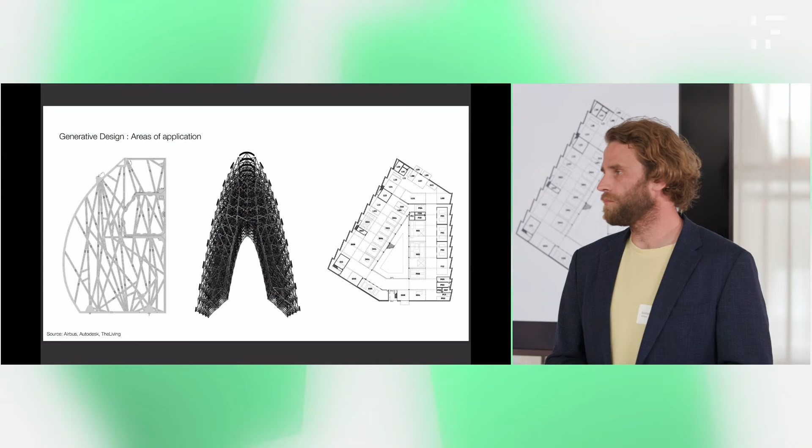So the big gift that additive manufacturing gave us was maybe not the production technology, but it was the advancement in new design principles that can be applied in other areas as well. So let's talk about the first partition, the Bionic Partition 1.0. To recap this a little bit, this project is quite old, and we have been looking at slime mold algorithms that we used to create a design of a lattice structure for a cabin partition.

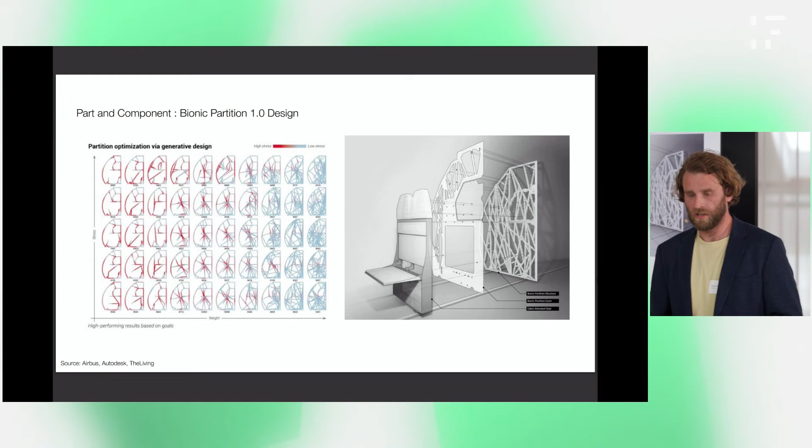I also will talk about a partition 2.0 and 3.0, but all of these partitions have one thing in common. We wanted to decouple the core structure, which is made from metal, from the decorative elements, such as covers and so on, in order to have an increased recyclability. So environmental concerns also play a major role when we talk about additive manufacturing, because additive manufacturing in general will allow us to reduce the weight, and in the area of aviation, this is basically one of the key facts to decrease cost and to improve the product performance.

So the partitions I want to talk about today are shown here. At the very left-hand side, you can see the standard partition, which had a weight of 65 kilograms at that time. It comes with a technical performance where we measure the deflection of such a panel under a 9G force. For the first partition we did, you may have noticed that some mass indications are missing here. I'll come to that later.

The first partition we did was made completely by 3D printing, by additive manufacturing, as we say. Made from Scalmalloy, which is an aluminum magnesium scandium alloy, which we can only create in a 3D printing process. Because of the chemical behavior of the material, we need very high cooling rates for the material to finally get its properties. So we cannot use this Scalmalloy material with casting or even milling processes, because we really need this cool down in the build chamber.

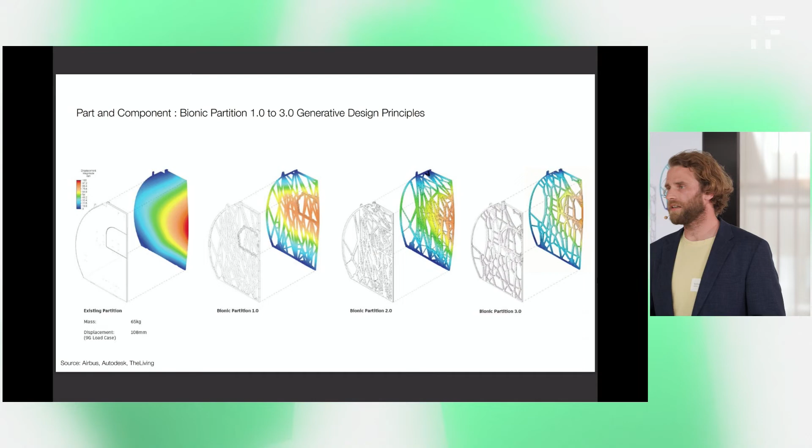The second partition was a one-shot design for casting. Why do I say casting? Because we teamed up with a company who printed the entire tooling for it. So we moved from direct printing to indirect printing in order to harness the cost benefits that casting can bring to us. And the final partition I want to talk about today goes back to a very traditional process, where we were looking at CNC milling.

But before we talk about the other partitions, I just want to show some pictures from our test campaign of the first Bionic Partition, which is fully 3D printed. You can see here at the left-hand side the test rig with the partition. We did this 3 years ago in a laboratory at TÜV Rheinland in Cologne. And you can see a lot of chains there. In one of the tests, we had a cylinder that pulls 5 tons, and we had to distribute this force to dedicated points on the partition. So we had a construction in front of the partition, called a whiffle tree, that allows us to distribute this high force into all areas.

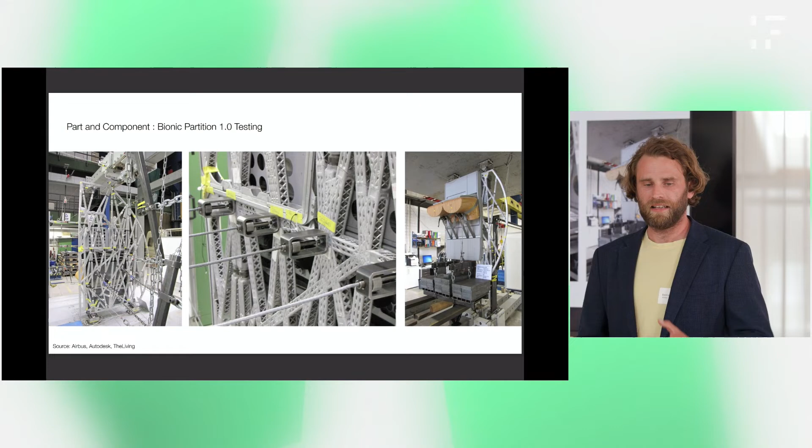In the middle, you can see how we managed the connections. That was a project in itself, to really make the best design for a component that was 3D printed at the end of the day. And at the right-hand side, you can see also a very interesting picture. This is the so-called upward force test. So we were looking at forces that go up. So we turned everything upside down and just put some weights on it.

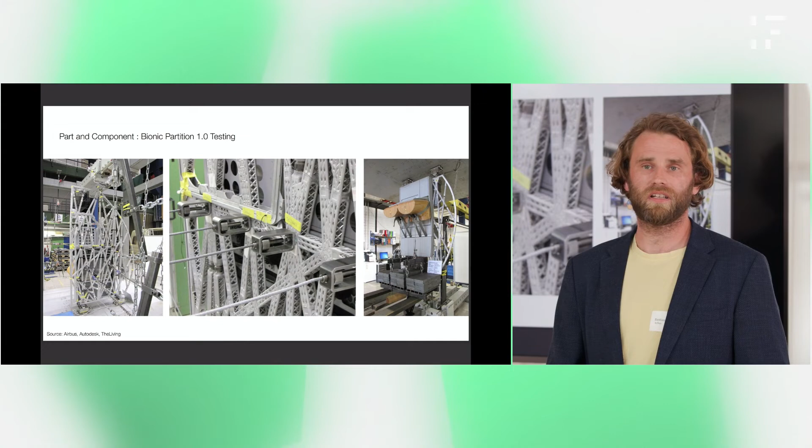The result of these tests was that we almost satisfied our 9G static test. Unfortunately, the partition broke at a certain point, not due to the use of generative design, but because I had designed a bad component that was the root cause of the collapse at the end of the day. But I can tell you, we were all impressed by how great such a design made from lattice structures is. So with some tweaks and some redesigns, I'm pretty sure this partition would also resist the kind of forces that we require.

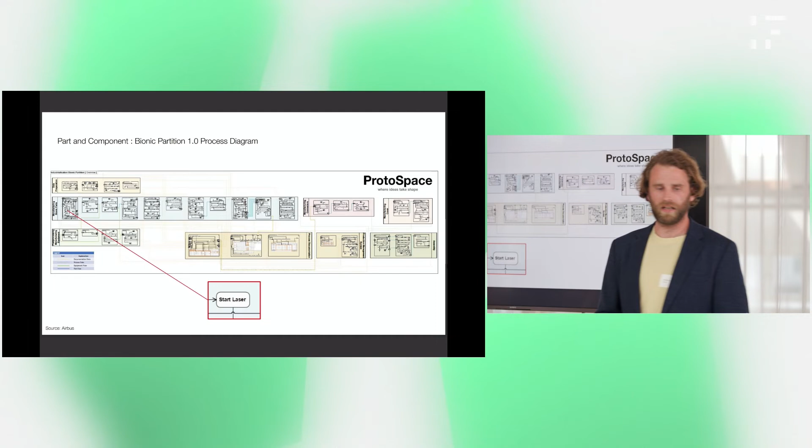This is one of my favorite pictures that I want to show you. This is the entire process of how to design a bionic partition. And what we are talking about is this small image here in the center, start laser. This is what the entire industry is talking about: we can get manufacturing-ready components right away and just have to push a button to build a component. But this is not true. Additive manufacturing comes with a long process, especially when we talk about certification for aircraft components. Here in the center, you can see all the processes and post-production processes that are required to have one component in your hands at the end of the day.

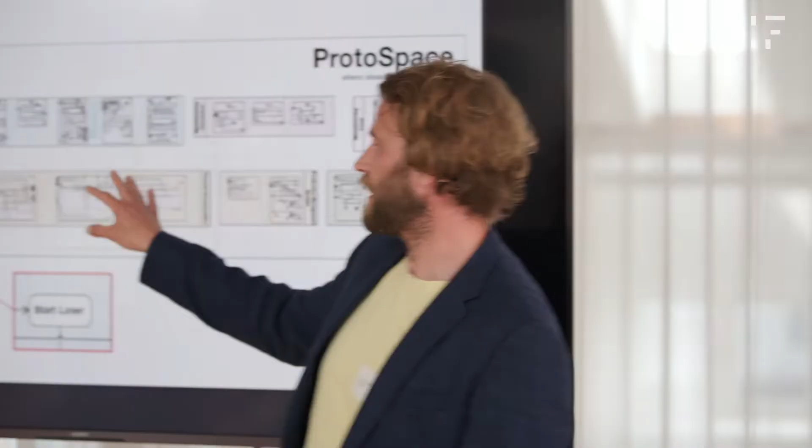You find here, for instance, removal of support structures, CT scanning, and other tests and quality assurance tests that we have to fulfill. And the rest of it is data management and production of other components such as the decorative panels and so on. I just want to show you this because it's really important to understand there is a lot of knowledge in the entire process of additive manufacturing. And ideally, one day, we can automate as much as possible in this process to make additive manufacturing more cost efficient, usable and scalable to other components.

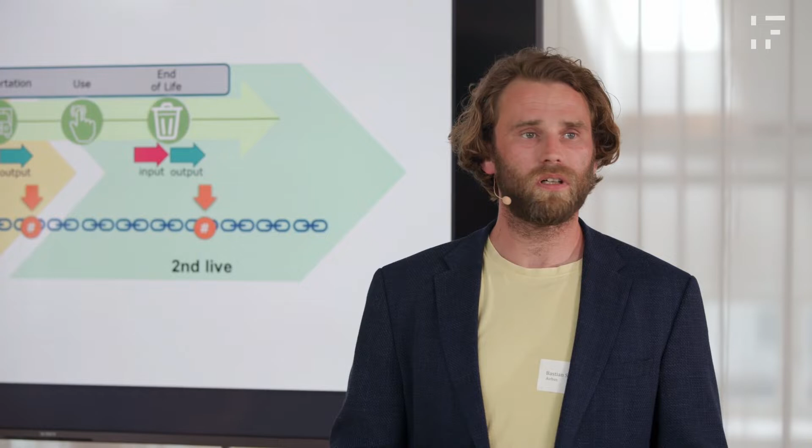When you have such a kind of process, you quickly will think about using eventually blockchain technology in order to make the data management. And this is exactly what we did. We did a life cycle assessment for this partition where we have been using the processes. And in the end of the day, and this is going to be presented in 2 months in Berlin, we've been participating in a funded project where we built a blockchain for the entire production process for the Bionic Partition based on the diagram I've been showing you here.

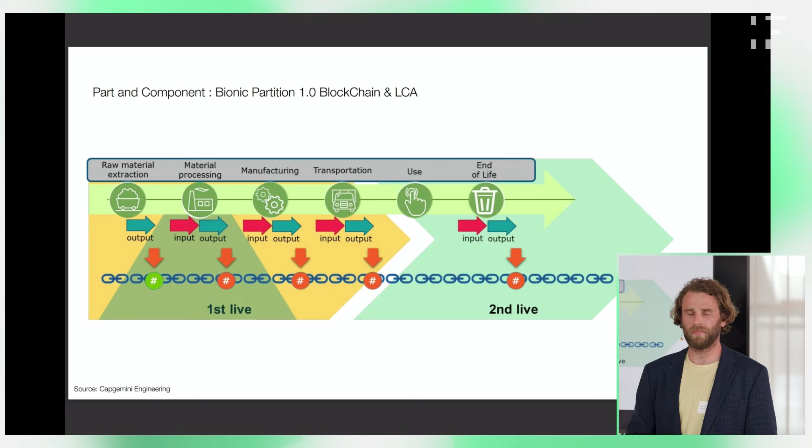So this is also one of the key ingredients in order to automate the process even further. If you have a lot of processes, try to automate them, and eventually blockchain technology may play a role here in order to secure and validate your data and finally also the hardware of the partition. When we have been finishing this, we were looking at a potential factory that can produce, in the end of the day, 700 of such kind of partitions.

I would like to highlight these green boxes here. These are printers, and at that time we've been selecting the X1000 from Concept Laser as our baseline machine because it's big and it can produce a lot of components in a relatively short time. But you can see, even to produce one major part for an airplane with a production rate of eventually 700 pieces per year, you need a pretty large facility to do that.

So here you have the printing processes, and here in this area you have all the post-production processes that you need in order to have one part ready in the end of the day. And of course, we have design offices here. So in the end of the day, 14 people would work in such a kind of facility, and the cost of such a kind of facility would be between $30 and $50 million. And if this is your special topic, looking at production facilities, you may see 30 to 50 million. It's a big price for such a kind of high-tech factory in the end of the day.

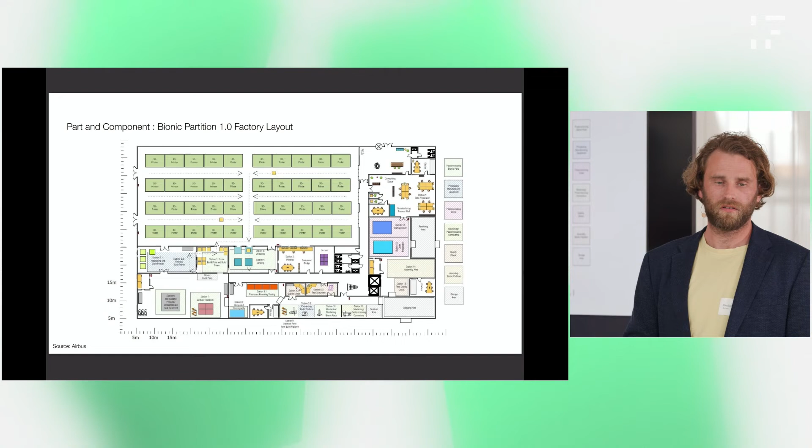Nevertheless, it gave us a certain understanding of how big the effort is to bring one part into an airplane. And of course, and this is what we have presented last time, we can use generative design in order to optimize also these layouts, as we have been presenting in other projects at Airbus, where we were looking at the projects and then designed the envelope of the building around that. This is a great approach which is brought by generative design to us, and which has its roots in our 3D printing projects in the end of the day.

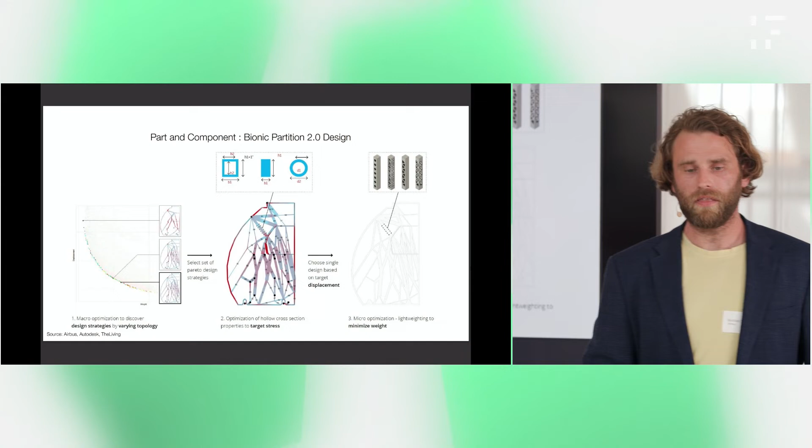So the Bionic Partition 2.0, what did we change? The design process is pretty much the same. So we still have Pareto fronts that we are using to identify the best design. We still have a macro optimization that tells us where the bars are running. The difference this time is we had to change the micro design. So we moved away from lattice structures in order to use structures that can be casted. So ideally hollow structures. And this is our micro optimization that tells us which of these bars could potentially fit best into the different areas of the partition.

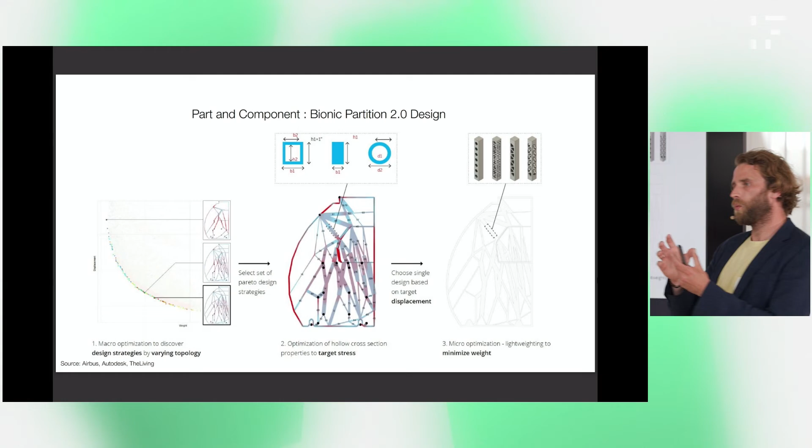Finally, we have selected only one bar, and we used a certain kind of parametrization in order to make this fit in all areas here. And this is possible. We can cast this in one shot in the end of the day, and the part is super light. Here are some other images because I just want to tell you, we not only have been doing one design, we were looking at multiple designs, and this is what generative design brings you. So you will never get the one correct answer from the computer. You always need your ingenuity in order to assess which design is the best one.

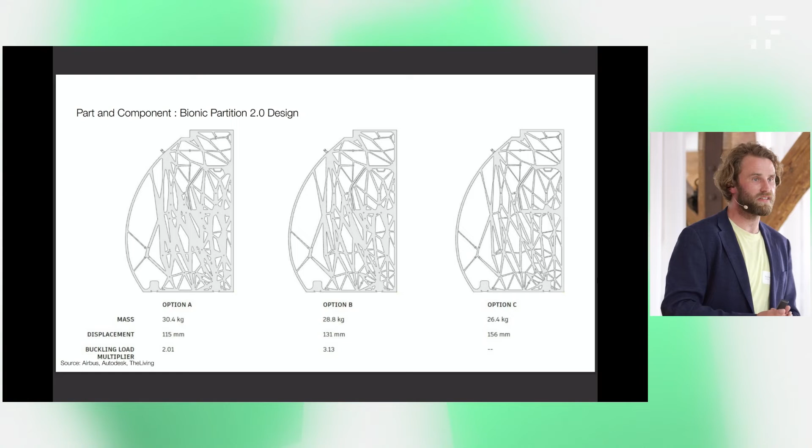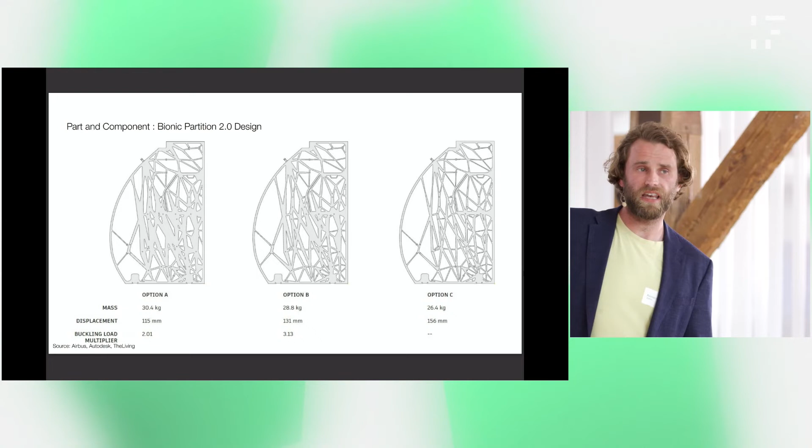And you may notice that the performance of these designs is always different. So coming from 30 kilos down to 26 kilograms, the technical performance is always different. And so we won't get rid of engineers, even if we automate such kind of designs in the end of the day. So especially our stress engineers have to assess each and every design and help us to select the best one.

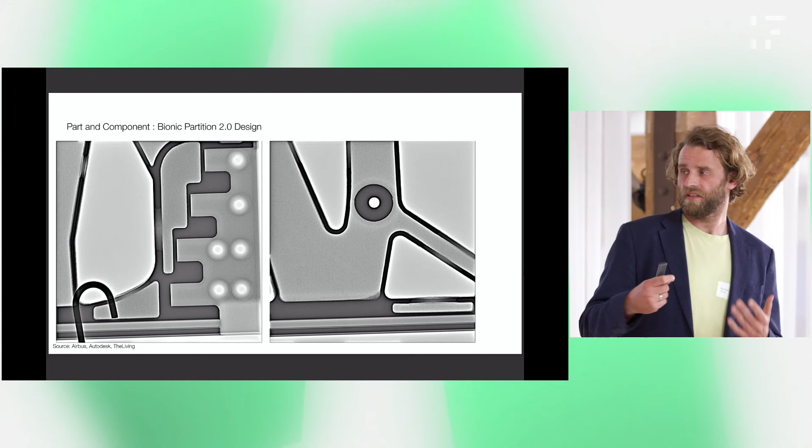Here are some images that we have received, where we have performed some CT high-resolution images. You can see the material is really nice. We also saw this with additive manufactured parts. Why am I showing this? When I'm doing CT checks for additive manufactured parts, and when I have lattice structures, you will not see anything here in these images.

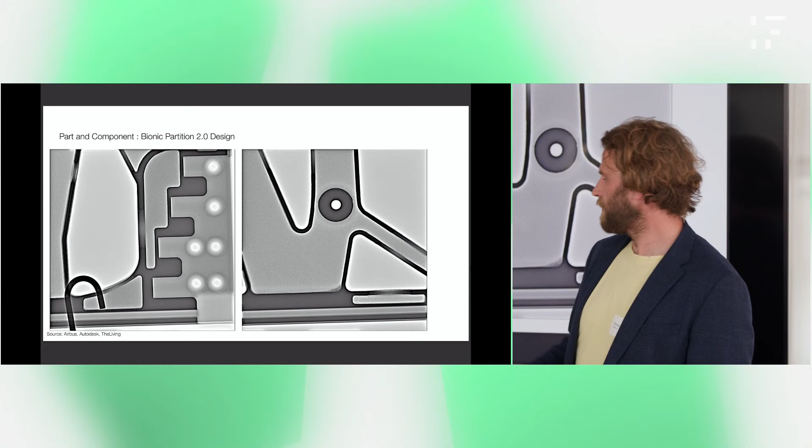You need some kind of other intelligence that helps you to identify cracks in such kind of parts. This is an advantage that I would associate more with casting components, because the material is pretty much clean and you have a much better quality control at the end of the day.

Let's take a closer look at the partition 3.0. Why did we do the partition 3.0? The first partition was not cost efficient enough. So to be frank, the cost of a fully qualified Bionic partition made from 3D printing would be 10 times the price that we wanted to have at the end of the day, due to lack of automation, but the industry is working on that, and other factors, of course.

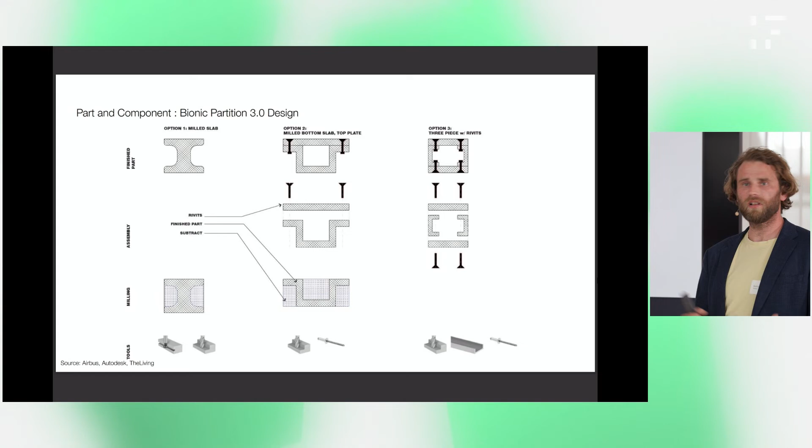And so we have been looking at a very traditional way of producing this part. And we had 3 approaches here. One was to use high-speed milling tools in order to create these double T beams. Then we were thinking about using laser cutting or water jetting in order to combine a plate with an optimized 3D structure. And at the end of the day, we also thought about riveting.

So when we moved on, we said that we want to go with high-speed milling and mill this entire partition, which has a height of more than 2 meters and a width of almost 150, from one big piece of aluminum. Of course, you have a bad buy-to-fly ratio here, but we said eventually we can recycle the material, which is waste in our case.

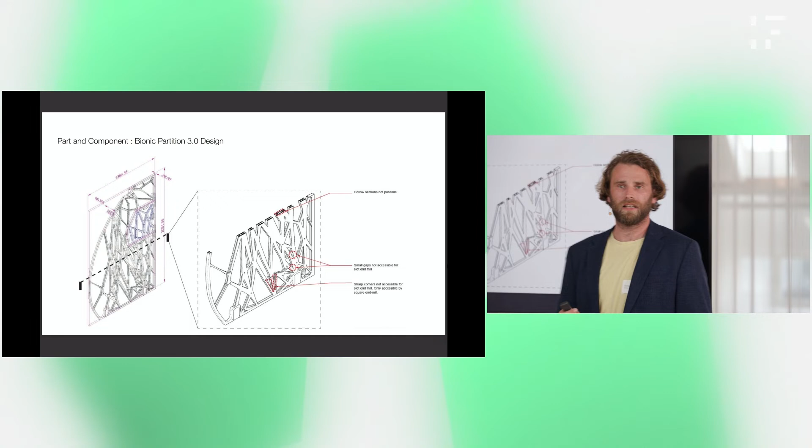So there's always this trade-off. If I'm looking more at a buy-to-fly ratio where I really want to use all the material, I would prefer to go with 3D printing. But when I look more at high-speed milling, in order to reduce the cost I would go with a more traditional way.

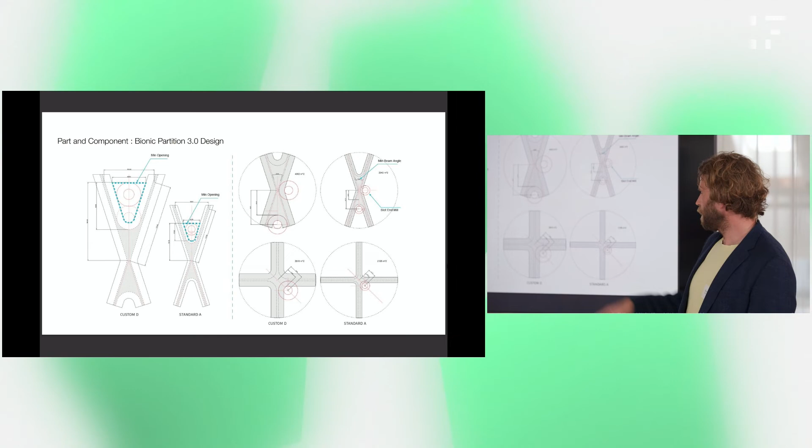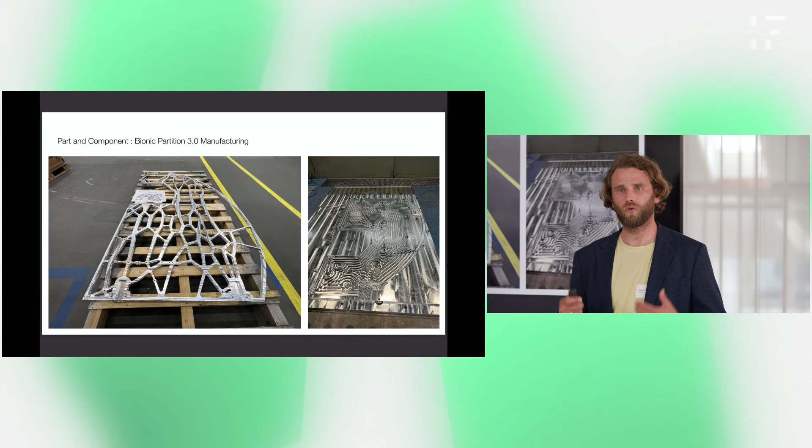You may see here one part is missing. This part is called stretcher flap. To produce one stretcher flap with 3D printing, it took me 1 week and 1 batch to do that. When I go to milling processes, it takes me 30 minutes. So the batch that I had to print took me 1 week, almost 5 days. So you can see there's still some homework to do to bring additive manufacturing up to speed. But again, the first partition was done a couple of years ago, where we only had 1 or 2 laser machines.

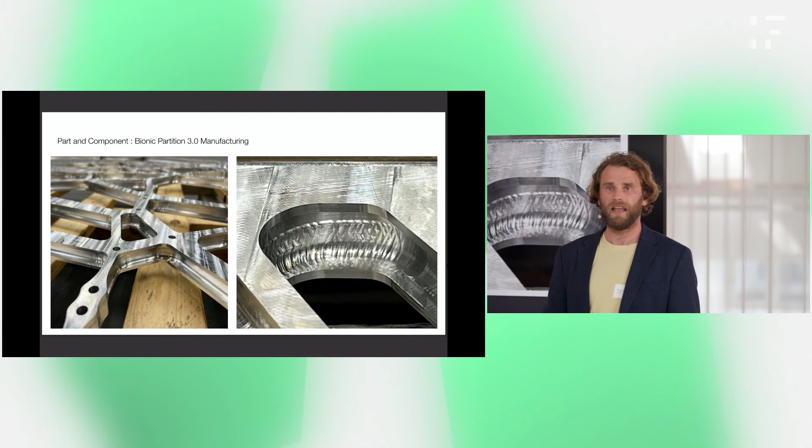Also, some details here. Even if we use traditional technologies here, not everything is fine. You can see here are some scratches in this very narrow radius. So also, CNC milling doesn't come for free. It also requires a little bit of research, but the entire design was great. And this time I did not have bloody hands because I did not have to assemble all the parts that I had to do with the 3D printed parts.

At the end of the day, what is the result? In terms of 3D printing, we were able to reduce the mass by 46%. So from 65 kilograms down to 35. Mission accomplished. You don't see this very often when you do aircraft components. But what was really surprising for me, when we are printing the tooling and go with casting technologies, we can drop the weight even further, because with a 3D printed design, I had titanium connectors to consider, which make the entire part a little bit more heavy. Here, it was a one-shot casting approach.

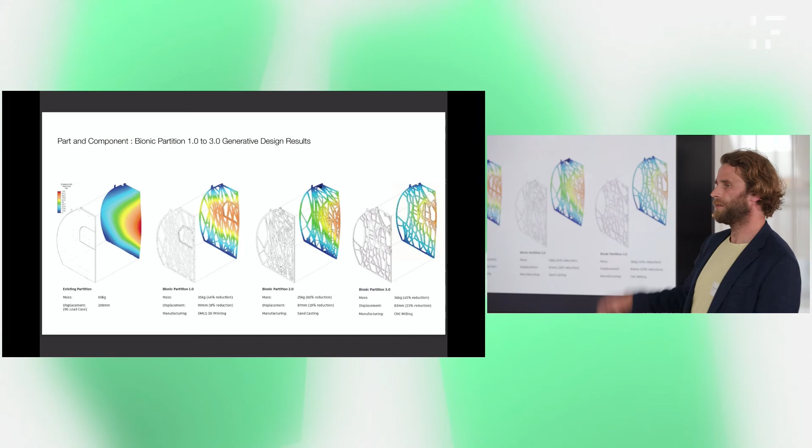And finally, the partition that is using CNC milling comes to the same level of weight reduction as the 3D printed partition. And this is a great learning curve. Here we have developed the algorithms, and here we applied them to more traditional production technologies.

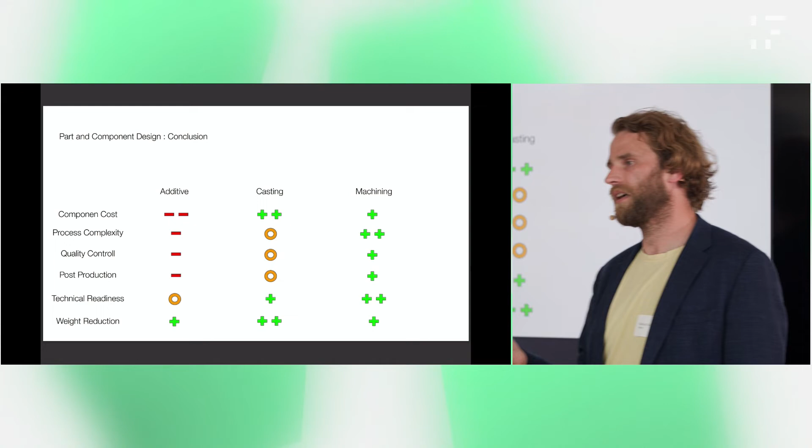So maybe 1 or 2 words on my conclusion. Additive manufacturing, for our case, is still too expensive. So look for multifunctional parts that require a lot of labor. Casting and machining have some advantages here. Also the quality control, looking at all the processes that we have, like CT scanning and so on. You will have to consider more processes when you go with additive. It's better when you go with casting or machining. It's easier, let's say it this way. And the weight reduction is in all cases great, which refers back to the generative design process.

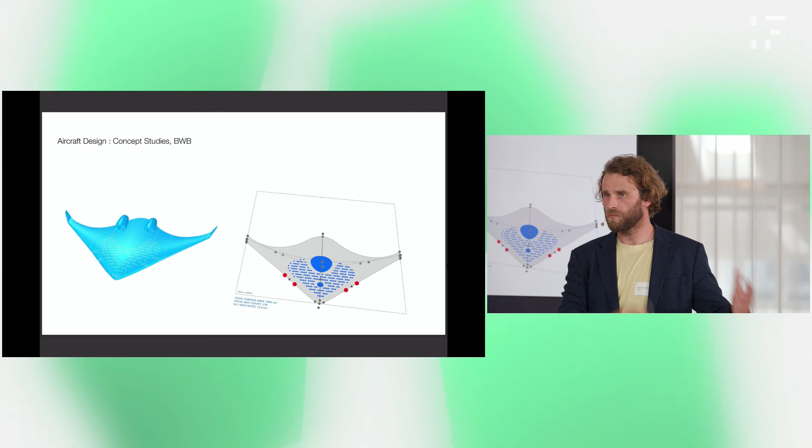One thing that we did in the past 2 or 3 years was looking at aircraft studies. So we've been looking at a generative design process for a blended wing body, for instance, where we can change the main parameters of this air vehicle. So we want to use generative design over scales: 3D printing, machining, casting for small parts, and process optimization for larger elements like aircraft and so on.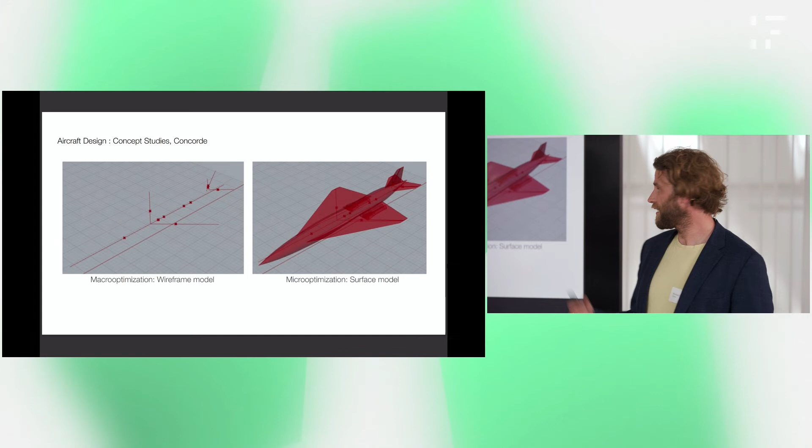Okay, that should be my final slide. So the last slide is missing, unfortunately. Thank you for your attention and for listening. And if you have questions, feel free to ask them now.

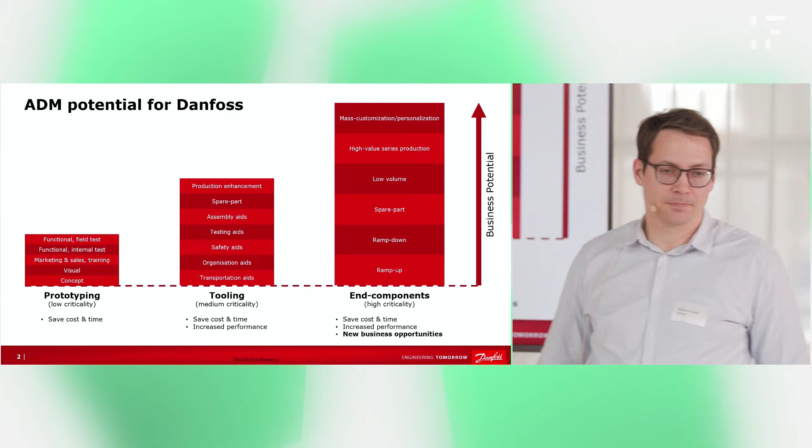Some more background. When you want to be successful with additive manufacturing, you really have to understand what are the economics behind it. Where does it really make sense? And in essence, if you compare additive manufacturing with conventional manufacturing, in conventional processes like injection molding, you typically have quite high investments in the beginning, sunk cost. You have to buy a mold that you need to have to automatize. But once you have this investment, it's really great for large volume series production.

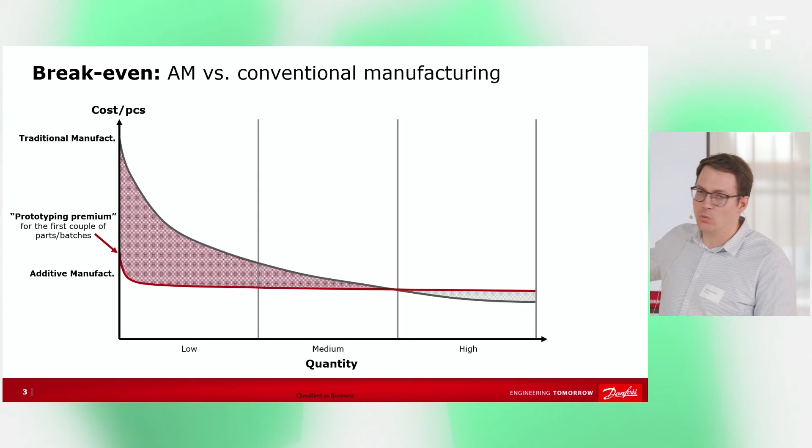Additive manufacturing, on the other hand, you don't have these high costs in the beginning, so it lends itself more to the lower quantities. And now, based on that, what is the impact that design for additive manufacturing could have on that? And for me, it's all about value for money. You have to master this game to really be successful in using this technology. And some challenges about that we already heard in the meeting before.

For me, design for additive manufacturing is really critical here because it can both influence the value that you can create with the design freedom of the technology, but at the same time also the money that you spend on it. And this principle applies to all manufacturing technologies, but I would claim for 3D printing, the impact of the design aspect is much, much higher.

In terms of value that you can create, in Airbus, they're very much interested in lightweighting, because of fuel efficiency, but you can also have more compact designs, longer lifetime of parts, better performance, energy efficiency, for example. That's a very big topic for Danfoss. And for example, also parts which are easy to maintain or assemble. And then also customization. That's, for example, a big topic in the medical sector.

And when you look at the money side of it, the big factor is really the size of the part. With the Airbus case, we heard large parts, 2 meters high. You really need to create a lot of value to make a good business case there. So size really matters when you want to produce in higher quantities, and also the process that you select. And it's really this here that you have to master, that you understand this design thinking and what's really behind it. And I try to shed some more light on that.

On the left side, you see a fairly large metal part, roughly this size. It is a sensor. And this is basically the first design iteration. Whatever comes after that is even more advanced. I can't show you, so just the first iteration here. But basically, traditionally it has been made from a lot of cut metal parts and then welded together. So here we have an assembly reduction from 10 to 1 piece.

And even with this just basic consolidation, no further optimization, we could already break even with traditional manufacturing because the volume was rather low, lower than 1,000 pieces. And then in the following steps, we did much more optimization to reduce costs even further. And on the right side, you see a gripper case. These are fixtures used for carrying our products in the factory.

And just on buying new grippers, because they wear down, Danfoss spends about 50,000 euros every year in Mexico. So it's like a series production, even though it's just used in the factory. And here also the first step was just to look at the entire assembly and see, okay, what can you merge together? And here it's just 3 to 1. And you will see this example coming up at a later stage again. So consolidate what's possible. First step.

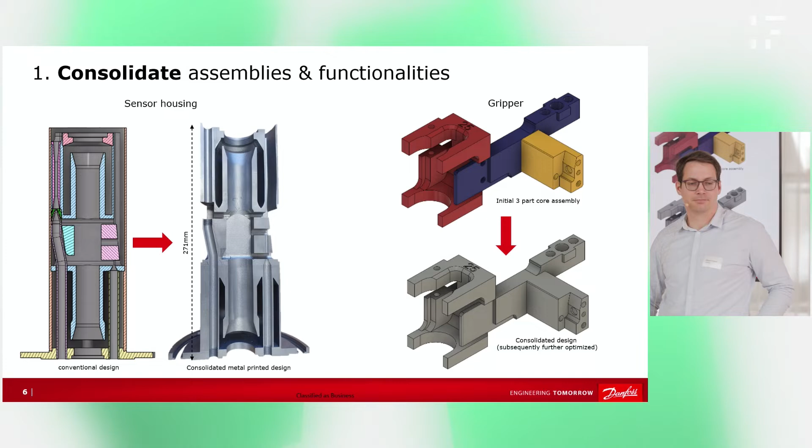Next, optimize the performance. And here I just have some simpler examples, but I will go into that at the end as well. We have here one tool, maybe in some other articles you might have seen this before. It is a tool which needed to be lightweighted for better ergonomics. It's used in the factory in France where they assemble compressors. And this assembly process, it's mostly manual. So these tools are carried around several hundred times each day by the operator.

Normally it was machined from aluminum, weighed about, I think, 1.5 kilos. And now we looked at 3D printing with the design freedom, how much could we optimize it? And we came with this nice solution where we lightweighted it with this lattice. And the result was that, well, the part was more expensive, indeed twice the price, but we saved about 76% of the weight. And on top of that, because we switched from aluminum to titanium, the lifetime of the part is probably 5-6 times higher. So in the end, great business case.

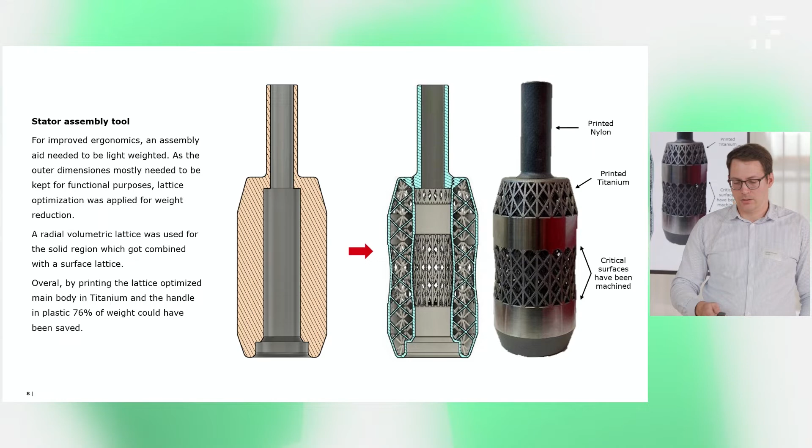Then also continuing with this one, how to optimize it. Earlier you saw this consolidated part. Then the next task was, okay, let's optimize it. And here again, we used also generative design on this rather simple application. So here we started with some preserved starting geometries, and all the rest, the organic structure around, was done by the computer, by the simulation. And here we now have this really optimized for the load case, this tool. It's not tested yet, we are still developing it. And here my prediction would be that it will probably last several times longer while costing just half.

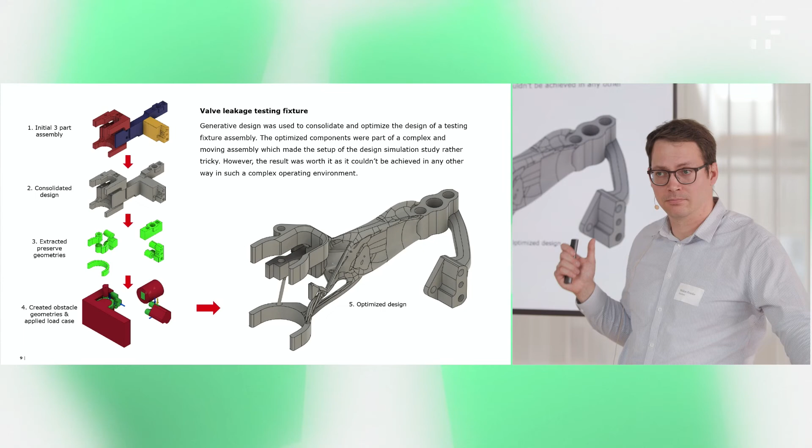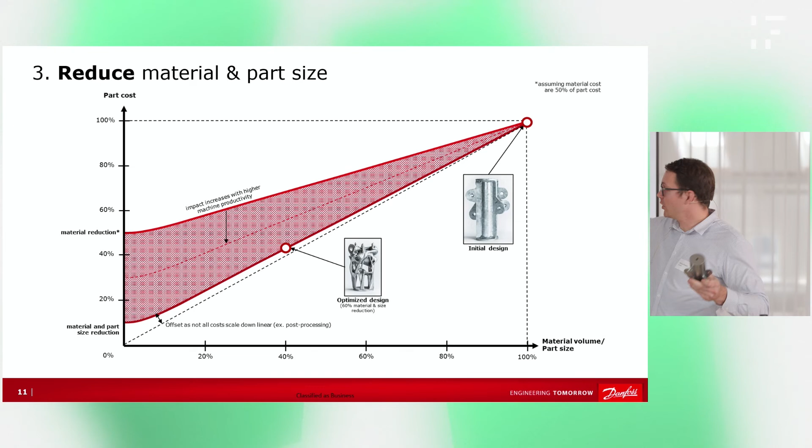You start here, but then when you reduce the size and the used material, you can really reduce the cost. And in this case, it was really less material, less size, and here I estimated it to be like a 60% reduction. And then basically you also reduce the cost by nearly 60%. So size really matters because of that. And for that reason also, 3D printing really lends itself to smaller parts if you want to produce in larger quantities. So if you want to print an airframe divider, the goal should really be to create as much value or print something smaller.

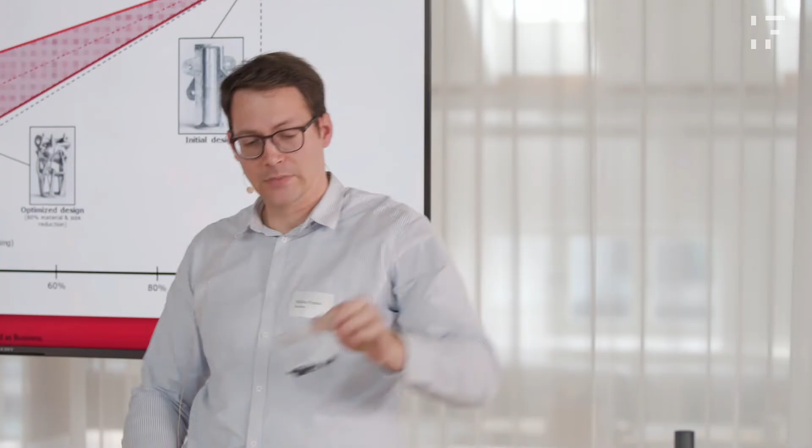For example, here, a very small bag with 15 seals, which are used for leakage testing, again in our Mexico factory. These seals have normally been compression molded, and the factory uses 260,000 pieces per year. And since the part is so small, it's very, very cost effective compared to traditional manufacturing. And here we just ordered 200,000 of these, and it's cheaper than conventional molding. So every year, Danfoss will order 200,000 of those. So really size matters if you want to go into serious production.

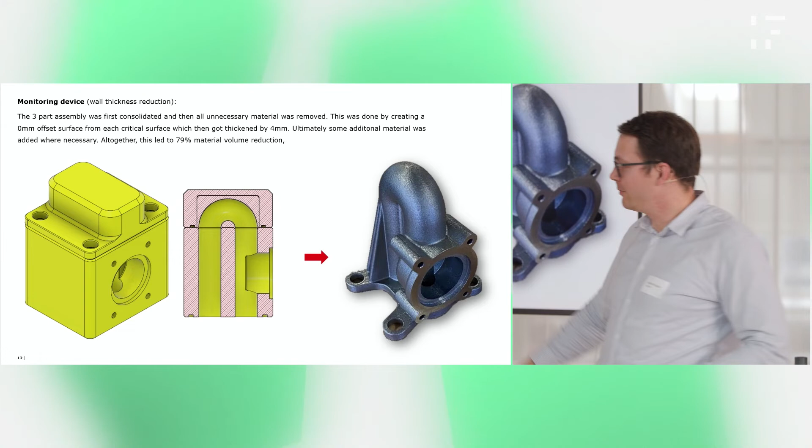Another benefit is, if you use less material, there's also less stress in the manufacturing process, which typically leads to better quality. That's another nice add-on. There are a lot of different ways to reduce the used material and size, and all of that has, of course, an impact on the sustainability of your production. A very simple, cheap way is just to take one design and remove any material not needed. That's the case here. That was one accessory for one of our pumps.

On the left side, the traditional design, 3 parts, machined from metal. And since the volume was so low, I just said, okay, there needs to be a better way to do that. So I just consolidated it all together and just took the inner structure and added 4 millimeters on top of that. Very, very basic, but now 3D printing makes sense here. Before it didn't make sense. That's really why design matters here. Besides this kind of very simple removing of all unnecessary material, you can also again use generative design to use just the material needed to reduce cost. And here there's an example for a fixture used for our heat exchanger testing.

On the left you see the very traditional design, cut, welded together, and with simulation we were able to slightly undercut the traditional cost. So simulation can be used both for value creation but also cost reduction here.

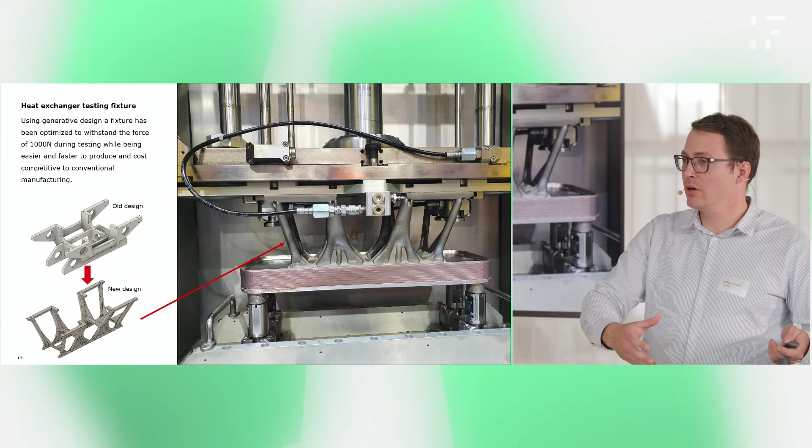So very accessible. And again, also here, not only cost reduced, but also initially we had some issues with warping. Reducing material, no more warping. Better quality, better price. And now the last topic that I want to go into is optimize for manufacturability.

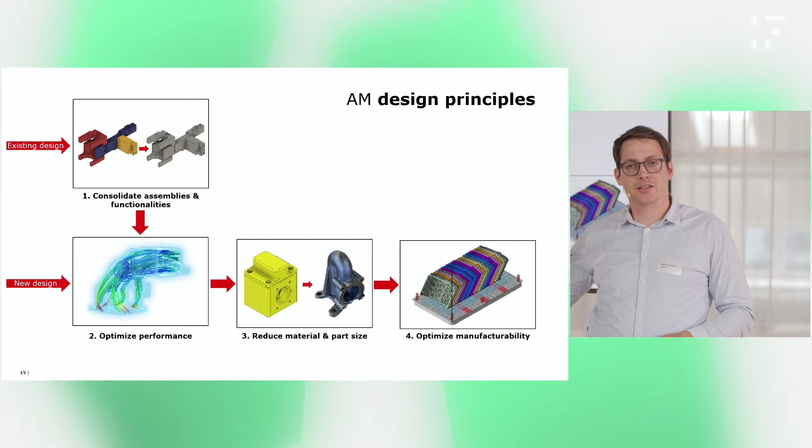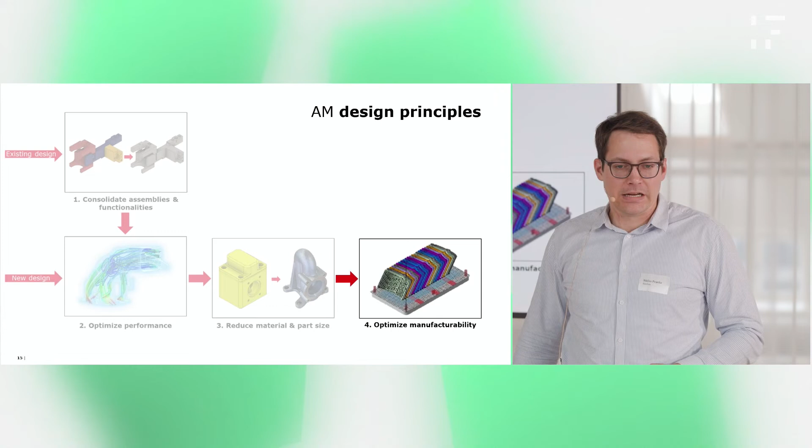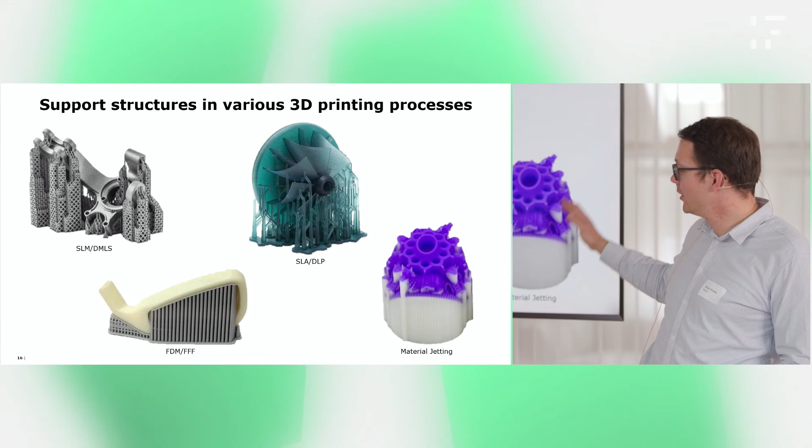I have it here as the last building block, but of course, when you start this design thinking process, you're more or less already sure what would be the best technology from the start. So in the end, it's basically just the last tweaking to make it most cost effective. And there are different aspects. One is, for example, support structures. You might have heard of it. It adds cost, machining cost, material cost, labor cost, because some poor guy will have to remove all of this. This should be reduced.

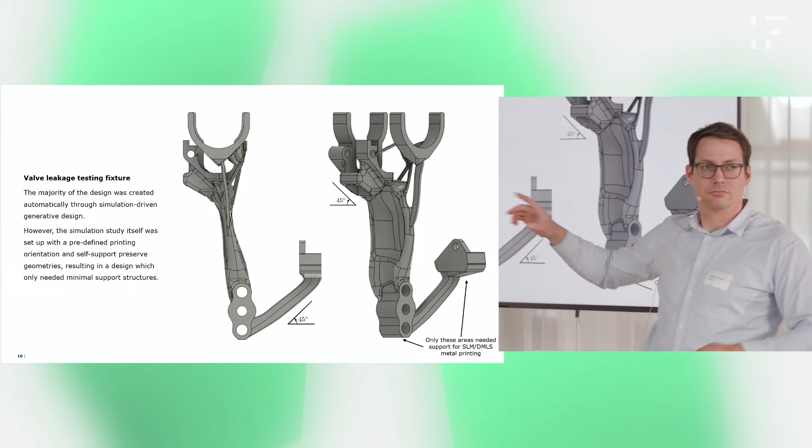There probably could be somebody talking for hours just on this topic. I try to keep it simple. Just look at a tree, how it grows towards the sun, 45-degree angle. If you keep this simple rule, probably you won't need any support structures. And that's also what we see here. It's growing up organically, roughly 45 degrees. If you follow this, you will make sure costs will be kept to a minimum.

Once you optimize the production of one part, you have to look at the entire build job, because there could be several parts fitting into that. And there is the topic of part nesting, which is relevant to fit as many parts as possible. Here we had a case. It is a brazing cover, a heat shield, roughly football size, really large, cylindrical, and in the initial design, about 10 parts fit into the build job.

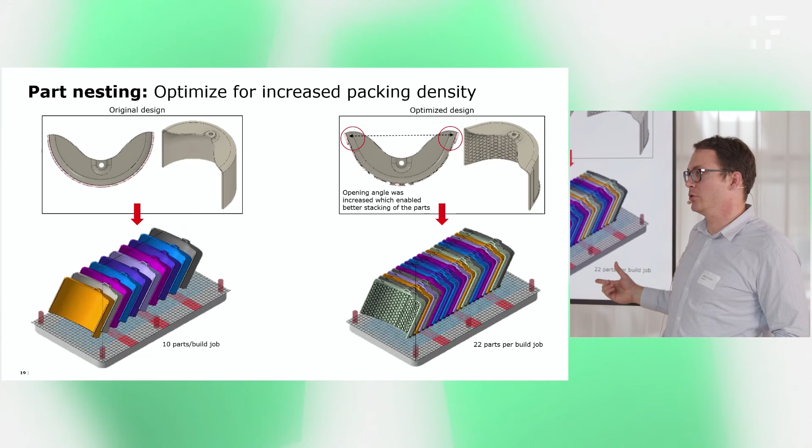But just by changing the design slightly, making it a bit more open, we could stack it much better together. And now 22 parts fit. So if this is 100% cost, this might be 120, 130% cost, but more than double the output. That's again why design matters here.

And also, once you've printed the part, there are probably some considerations about the post-processing that you have to do. This is a fixture for thermostats used in the factory. They needed 2,000 new ones. So we looked at 3D printing. The initial design, we could just easily print it. But because we needed 2,000 pieces, we also had to look at how easily you can automate it throughout all processes. And when you want to print these 2,000 in plastic, you want to do automated powder removal.

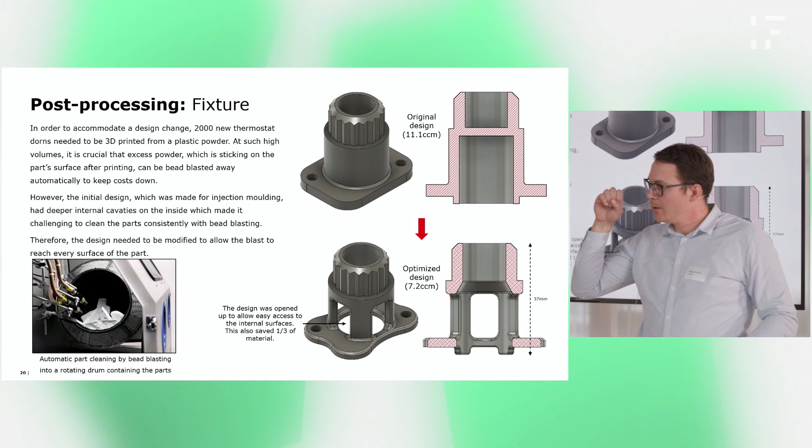So that's why we opened the part up here. When the part is being cleaned, it's basically a big drum, turning, glass beads blast into it. Every inside surface should be hit by these glass beads. And by opening it up, we could ensure that the part is properly cleaned. So it's really design thinking through every individual process to get the most value for the money spent.

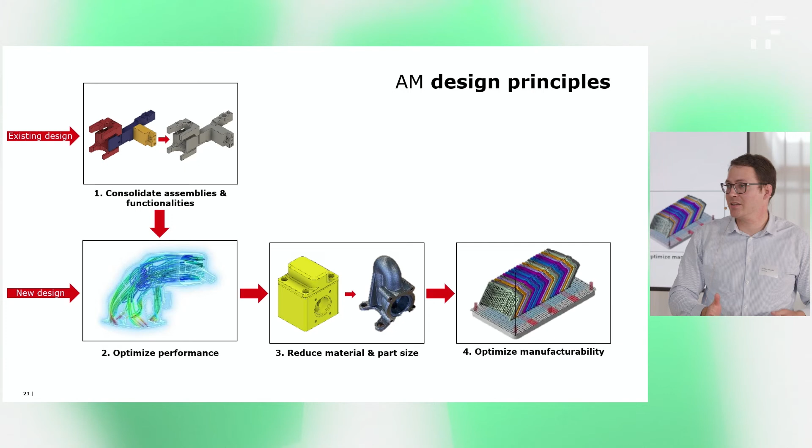And with this aspect, I think it will be much easier for us in the future to sell this added value, even if it might cost more. In the past, it has been quite difficult from time to time. So this will be the major driver for all the future success stories at Danfoss.